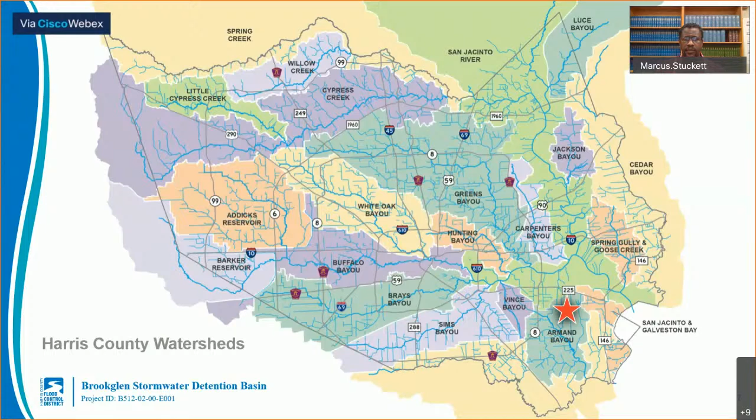Harris County includes 22 main watersheds, totaling approximately 1,800 square miles and more than 2,500 linear miles of channel. 2,500 miles is approximately the distance from New York to California. So our area is flood prone, and here are some reasons why: we're prone to extreme rainfall, including tropical storms and hurricanes, we have flat, slow draining landscape or topography, and we have clay soils that do not soak up excess rainfall as quickly.

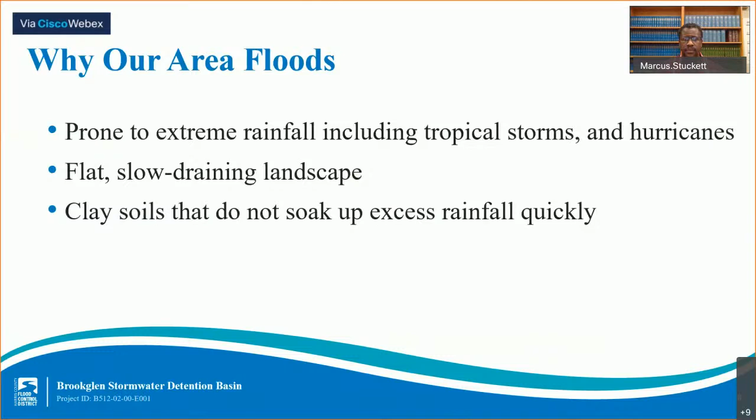On August 25th, 2018, Harris County voters approved $2.5 billion in bonds for flood risk reduction projects. This vote followed a series of meetings across Harris County in each watershed, which resulted in a list of what is now 181 bond projects. 144 of those 181 projects have been initiated so far, including 10 in the Armand Bayou watershed.

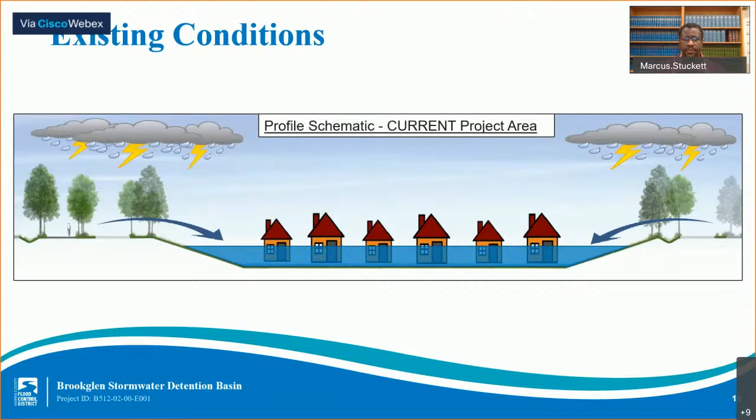The proposed stormwater detention basin will be a large engineered structure, constructed by excavating the existing soils within the area. It will be dry bottom basins with outlets that drain into the flood control district channels.

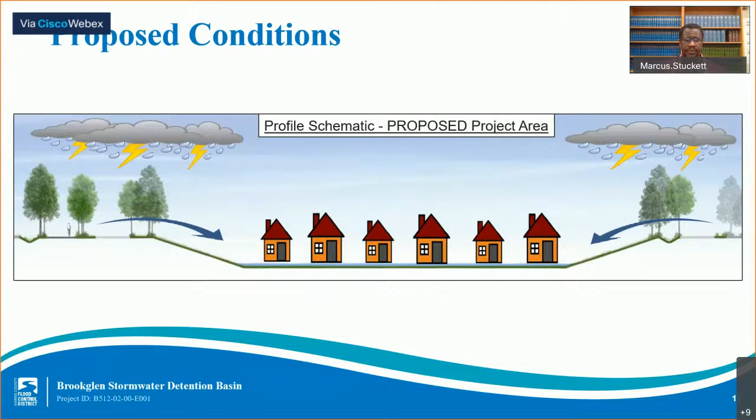During normal storm events, runoff will drain into the proposed stormwater detention basins. And during large storm events, the basins will take in and temporarily hold the stormwater from the channels that they are connected to, reducing the potential for erosion and flooding downstream.

Once those stormwater levels recede, the stormwater from the basin will drain slowly back into the channel and then continue downstream.

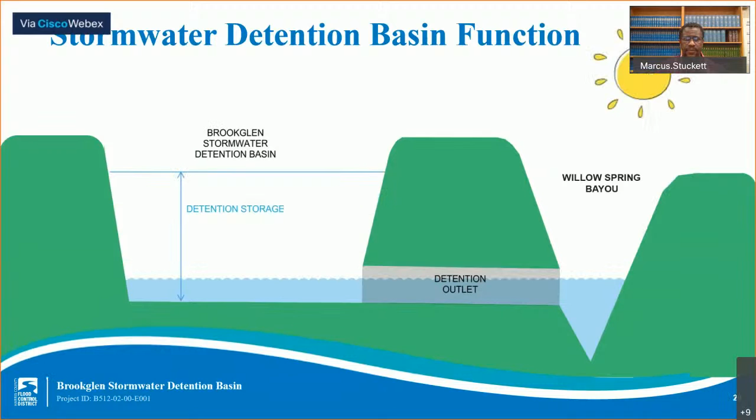There are two basic types of detention basins. There's a wet bottom, which can include a permanent pool, a vegetated shelf, and a bottom shelf, providing habitat for wildlife. A dry bottom basin will include a pilot channel as well as possible amenities such as ball fields or parks.

A dry bottom basin is recommended for the Brookglen subdivision due to Federal Aviation Administration regulations, intended to discourage conflicts between aircraft and birds. The LaPorte Municipal Airport and the NASA flight operations at Ellington Field are both near this proposed stormwater detention basin. Hence, we decided to go with the dry bottom.

This project proposed three different alternatives for design to maximize the detention storage volume while working around that existing 30-inch natural gas pipeline and considering the cost and hydraulic impacts. Those options included relocation of the gas pipeline, placing a culvert underneath the gas pipeline, and finally just avoiding the gas pipeline altogether.

From this summary of alternatives, Alternative 2 was recommended for final design. This alternative provides the largest storage volume, avoids the 30-inch natural gas pipeline, and was determined to be the most cost-effective alternative. The benefits are that it potentially provides the mitigation needed for future locally funded storm sewer improvements that could reduce neighborhood flooding risk.

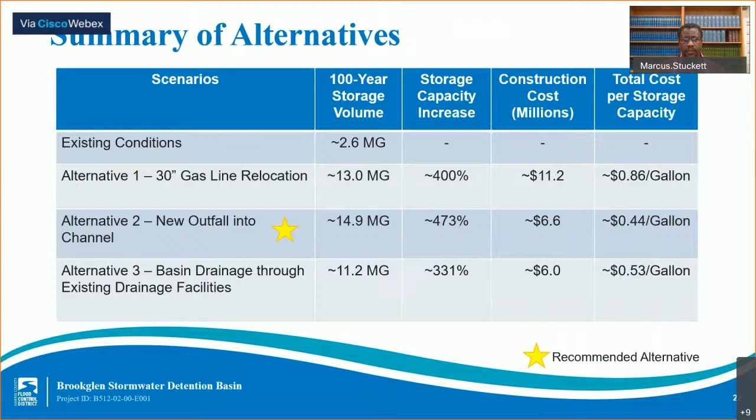So now we can look at these alternatives in more detail. Alternative 1 includes the maximum use of the South Basin footprint. This alternative assumes that the pipeline crossing through the South Basin will be relocated from the entire proposed footprint of the basin. The proposed basin would connect to the existing City of LaPorte Brookglen Park detention basin via two 36-inch reinforced concrete pipes that will go underneath Somerton Drive.

Alternative 1 would rely on overland flow to inflow into the Brookglen Park Basin, and the equalization of that flow through those 36-inch culverts to fill that detention basin. The existing Brookglen Park outfall would remain as is, with some recommended improvements to remove silt buildup that's accumulated over time.

The cost of the pipeline relocation would likely exceed the Natural Resources Conservation Service grant funding that we received, but we kept this alternative for comparison purposes, as it gave us an idea of what the maximum detention scenario would produce.

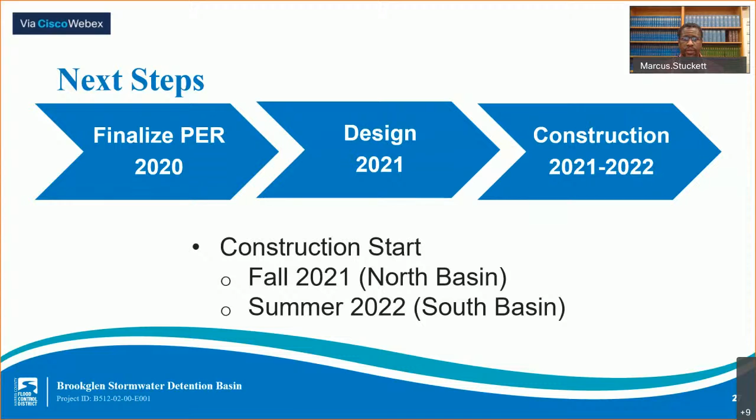So what are our next steps? The preliminary engineering stage will be completed in fall of 2020. The design stage will begin in the beginning of 2021. The construction process, we anticipate, will be split into two parts. The North Basin will start construction in fall of 2021, and the South Basin will start construction in summer of 2022.

As I mentioned before, this project is intended to be one of several projects for the Brookglen area and the Armand Bayou watershed, and all of those will work together to reduce flooding risk. The Flood Control District is now conducting an Armand Bayou watershed planning study, which will identify additional flooding issues, and there will be some suggestions of projects from that study. You can read more about these current or future projects proposed on the hcfcd.org website.

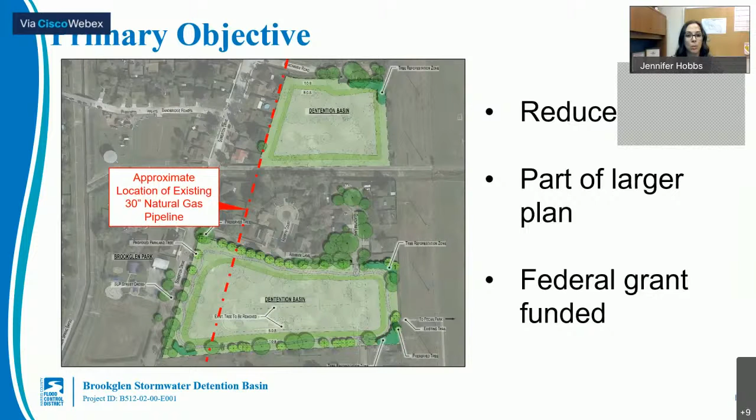Yes, Sparkle. Thank you for the question. The reason that we're building a stormwater detention basin in this area is flood control, along with this Brookglen area and some other areas around Harris County. We've had several buyout areas, and with the bond project, we want to make projects out of these areas, and specifically a detention basin here, which can help provide mitigation for future projects, as Marcus indicated, as a bigger plan for this area. So not only will it provide detention and relief to the adjacent areas, but it will provide mitigation for future stormwater projects as well. All right, thank you.

Marcus, would you take this next question? Can you explain why you don't just widen and deepen Willow Springs Bayou? Yes. So the difficulty with just widening and deepening the bayou is right of way. There's limited right of way along that existing channel. So in order for us to deepen and widen it, there are several homes along there.

So that would mean taking several homes, which we'd, being disruptive and taking - this is a great exhibit here - but widening, deepening that channel, each home that's along that bank, in order for us to get what we would typically need to just convey flow, we'd have to buy out all of those homes. Also, when you deepen and widen channels, you have to find the detention somewhere else as well. So it just becomes a more disruptive project, especially in highly urbanized areas, to do both channel improvements and detention. So you have to make some decisions to either do one or the other.

Thank you. Marcus, would you take this next question? Why is this project better? I think that goes back to the same point that I just mentioned, and only better in the sense that it allows us to be the least disruptive. Since the Brookglen area was already identified as a buyout area, the understanding was that at some point it would become a mandatory buyout area, which with it being such a low-lying area and being the bowl within that vicinity, it made a perfect spot for detention, which would allow other improvements to take place as part of this overall watershed or flood damage reduction plan for the entire area.

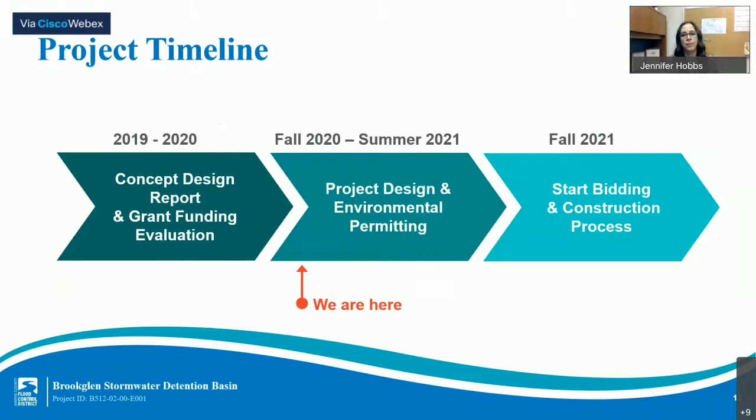Okay, thank you. Marcus, will you take this next question?

It is, you mentioned wet and dry basins. Can you explain why you're recommending dry basins?

Yeah, a large portion of that wet versus dry basin decision—even though we do have wet bottom basins, they tend to provide more volume because it's a flat bottom surface. As opposed to a dry bottom, where you have to grade it so that it drains properly and stays dry most of the time.

What's been driving wet versus dry here recently with the flood control district are the FAA rules and regulations as it relates to—I think it's called waterfowl drawing amenities or something like that. Whenever you have a wet area, it tends to draw birds into it. And as planes are taking off or landing, sometimes they encounter these birds or large flocks of birds, and it creates a dangerous situation for the planes coming in and out of these areas.

So we've been trying to avoid putting wet detention basins within this certain buffer that's been identified by those regulations. The driving force on this being a dry bottom was our vicinity to other active airports within the area.

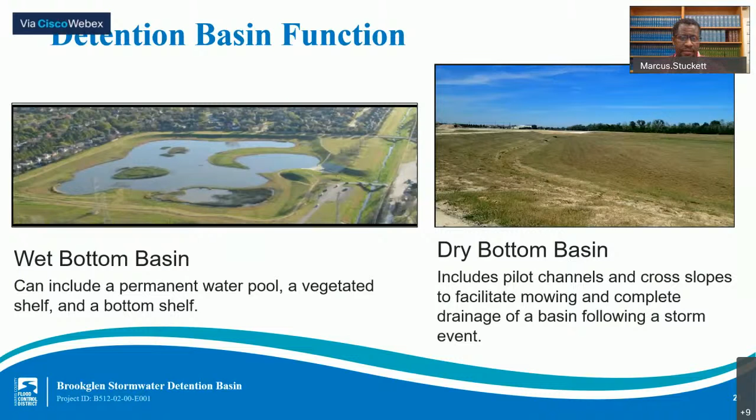All right, thank you. Jennifer, our next question is for you. How will the problem with B112-00-00 and B512-02-00 be resolved?

Hey, thanks for the question. So part of our feasibility study that I alluded to earlier, we looked at the history of this area. Back in the late 90s, channel B109-03-00 was constructed as part of a relief for B512-02, and it connected through Canada Street.

So we had that going over time, and then there was a restrictor put on Canada Street to drain it back over to B112-00. Now, the thing is, B112-00 can take the stormwater and can accept all the stormwater for B512-02.

The issue is because it's such a low-lying topography, as Marcus keeps alluding to, it's a very tricky situation to drain anything out. You can see here on this map on the screen, it's in a floodplain area, so it's very flood prone. The biggest thing we can hope for is eventually upgrading the local storm sewer systems in order to take more of that water, which B112-00 can handle, and also opening up the bridge downstream on Fairmont, which the feasibility study did show would be the best course and use for this detention.

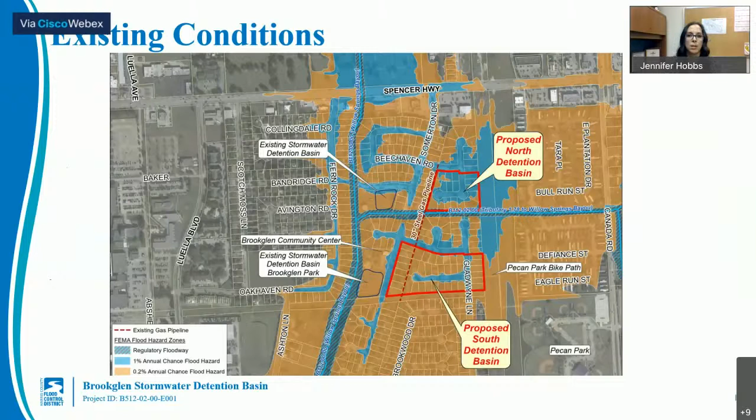All right, thank you. This next question is from Michelle, and I'd like for you to take it, Marcus. How will this affect property values?

Yeah, that's a good question. I'm not a real estate agent, so to be honest, I don't know how it will affect property values, but if I had to guess, I wouldn't say that it would—that's just me guessing as an engineer. But Michelle, if you can come up with an engineering question, I can definitely answer that better than what I just did. All right, Marcus, I'd like for you to take this next question as well.

We're getting several questions actually about buyout areas. Can they be redeveloped if not used for a flood control district project?

So redeveloped—I guess I'll define redeveloped. Redeveloped meaning converted to some other use other than a home, then the answer would be yes. So in some cases, we bought out lots and areas and they've become parks as opposed to detention basins, because the intent of a buyout is to avoid putting people back in harm's way. So if we bought someone out because they flooded 10 times, we would not allow someone to come back in and develop that and live there.

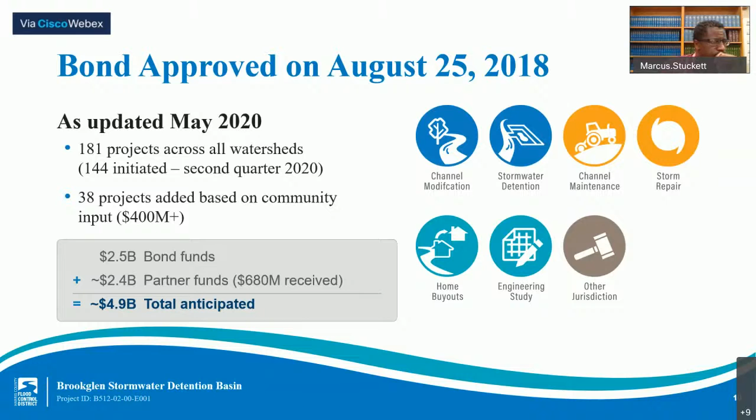Thank you for that. It's always good to hear how these projects fit into the larger scope of all the great work the Harris County Flood Control District is doing. Jennifer, I'd like for you to take this next question.

Are you able to say if there are additional buyouts or acquisitions anticipated for this project? Yes, I can say that is the case for this project. That's something we looked at in the feasibility study, and we take that very seriously because we understand it's a sensitive issue. These property owners, we've had many attempts to notify, and we're in the process of going through that. I can't speak too much on that - that's Harris County Real Property Division that takes it from there for flood control and Harris County Engineering. They take over at that point.

One thing I do want to note, there were questions coming in about other homes being bought out in this area, maybe outside of the project. We did look at several different scenarios in the feasibility process with our planning division. While in theory removing any other structure from the floodplain is always a good thing, we evaluated the cost benefit ratio and found this was the most ideal footprint. Any more buyouts, we're not seeing a much bigger benefit to the detention basin itself, so it didn't make sense to seek out other acquisitions.

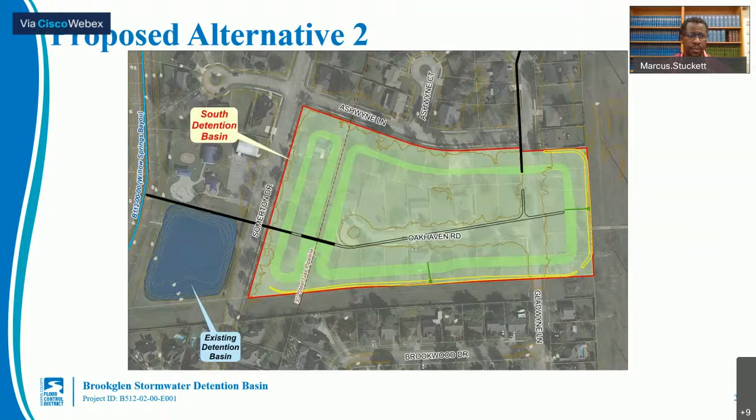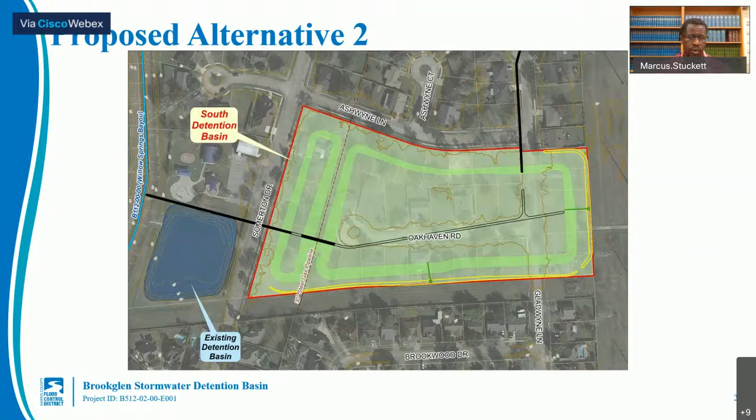So the idea for going with the proposed alternative 2: we looked at three different alternatives. One said let's completely remove the pipeline to maximize volume, another avoided the pipeline entirely, and a third was somewhere in between. We selected alternative 2 because it was the least expensive option, helped us avoid the pipeline that was there, and also provided enough volume that we felt would be useful for those future improvements we talked about. That was the reason that drove us toward a hybrid between avoiding the pipeline and getting the volume we needed.

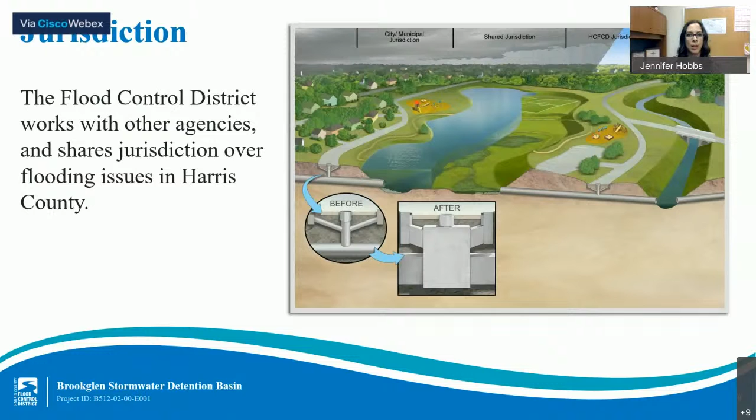I'd like for you, Marcus, to share a little bit about how important partnerships are when it comes to these projects, because I look at so many of the things we do, and often there's a partner involved.

Looking at the exhibit in front of you, you see all these different lines showing the different sources of funding that Harris County Flood Control District goes after to try to secure for flood damage reduction projects. That's important because even with the bond project and some of the projects we've identified in certain areas, we made assumptions on how much we would need, and we also made assumptions on whether or not a partner would come forward to fund some of those projects. So partnership in this case is a big deal, especially for this project, with the Natural Resources Conservation Service providing us with a large sum of funds to help with the design and construction of this project.

Because as we're finding out now, some of the funding for the projects that we assumed we were going to get previously, we don't have enough funding to complete some of these projects. So having different partners like the USDA, NRCS, the Corps, the EDA (Economic Development Administration), and others able to give us funds helps supplement some of the increases in costs we've encountered.

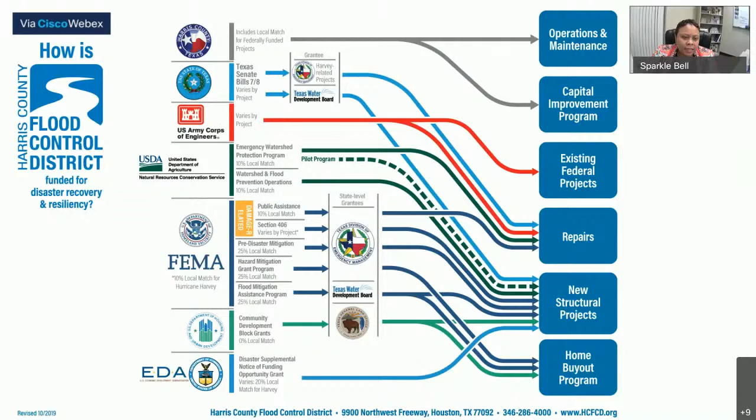Can you explain if having a basin near your home is a flooding risk or a benefit? So having a basin near your home would be a benefit, and here's why. When you look at a detention basin, in a case where we'd consider this one offline, that means you're taking flow off a channel and into a basin. Our engineering hydraulic analyses show that most of the benefit is seen in areas immediately around the basin, since that's where water pulls off first. As you go upstream, you see less benefit moving away from the basin, and you may get a little benefit downstream. But properties immediately near the basin typically see the largest reduction in flood risk.

All right, thank you. Jennifer, would you take the next question?

What are the plans to equalize the water levels between B112 and B109? Good question. The feasibility study showed our restrictor is the Fairmont Parkway Bridge. Unfortunately, we don't have jurisdiction over bridges, so this bridge would need to be raised to open up B512-00 and allow more flow through. At that point, per the sequence, we'd be able to regrade B112-02 back through Canada Road and open up those restrictors to allow flow back over B109-03, which would ultimately equalize levels. Additionally, B509, another detention basin downstream of B109, is going to be built and enlarged to hold more flow downstream, but that bridge really needs to come first for us to see any true benefit, as well as improving the storm sewer system in the Brookglen subdivision.

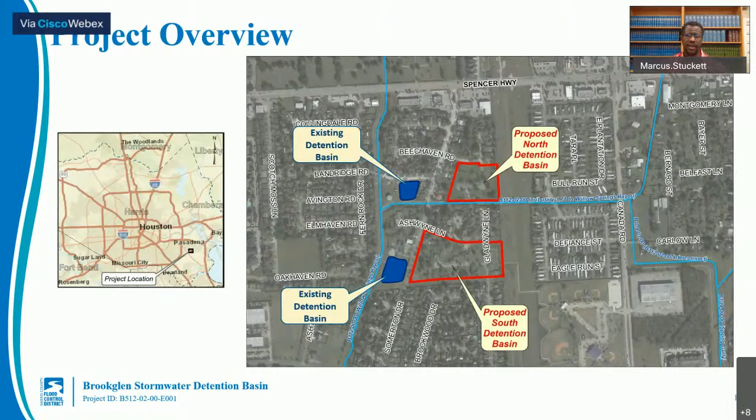In general, I won't say this project is the answer, but it's a component of the answer. This particular project gives some immediate benefit, but the larger part of the benefit will be realized through the other components that are part of the overall solution for the area. I think there are probably 6 or 7 different components, but Jennifer knows more about what those components are and what the sequences are, so I'll let her speak to those.

Yes sir, happy to. Right now our planning group, a different department than ours, has been working on an Armand Bayou watershed planning project. That project takes the entire area into account, because as a lot of you may know, we changed to Atlas 14 rainfall, which is how we plan these projects.

Simply what that means is we used to say that in a 1% event every year, a 100-year event, it might be 13 inches of rain. Now we're saying it's more like 18 inches of rain. So we have to look at that across the county, usually watershed by watershed, to make it make the most sense.

I think it's 99 plus acres downstream of the area, and that project is actually kicking off now. So that's something that residents can see in the future.

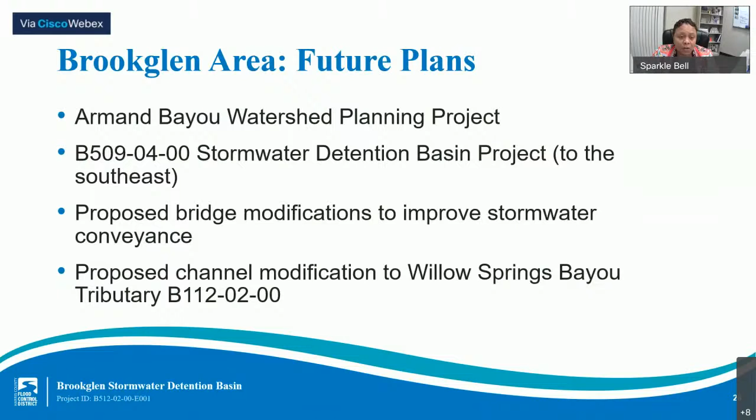Jennifer kind of alluded to it in her response. The basin has to come first in this situation because when you start upsizing storm sewers or modifying bridges, you're taking something that was once a restriction in the channel and opening it up. One example I like to give is pulling the plug from your bathtub. Once you pull that plug, you get a large rush of water going down the drain, but in this case it's downstream. So whenever you pull that plug, you've helped the people upstream of the basin, but you start to affect the ones downstream of the basin.

The reason the basin upstream helps downstream is because it allows you to take off more flow that would have gone downstream and hold it back to slow it down so you can pull the plug. So whether you put it upstream or downstream, that detention has to be in place before you do channel improvements. There are caveats, like putting storage within the channel itself—you can make the channel so wide that the increase in velocity actually slows down, becoming more of what we call inline detention. Detention is always important because if you do channel improvements, you'll affect someone else if you don't compensate with some type of storage.